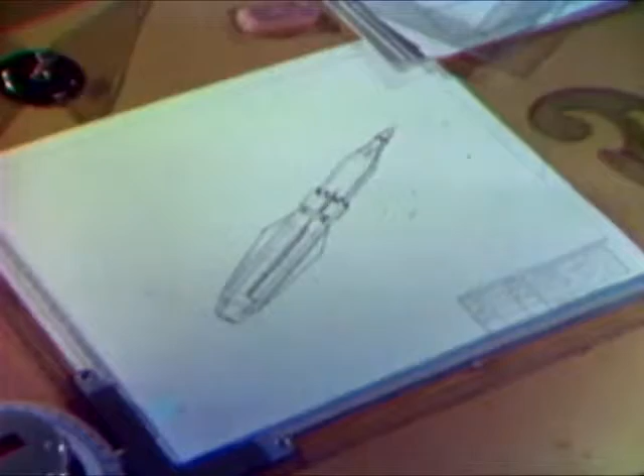Or will our ballistic missile early warning system tell us differently? 7, 6, 5. Not ours, but theirs. And if it is theirs, and this is ours? A better design on the drawing board is no immediate effective countermeasure.

Our birds must fly when they're required to. The high complexity of modern-day weapon systems demands the closest possible approach to absolute reliability. There is no second chance. So there must be absolute process control during system design and system manufacture.

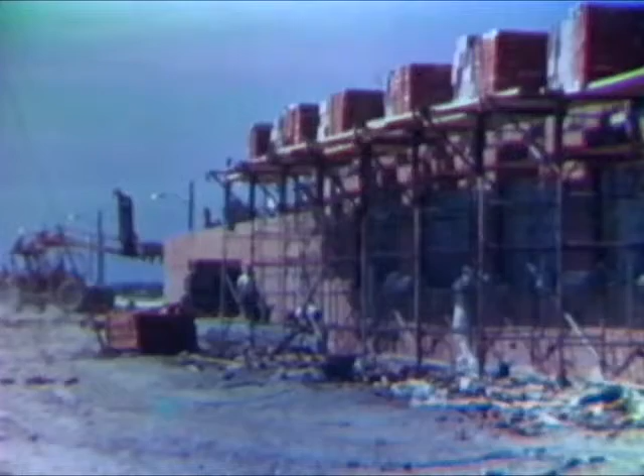Are these more imports from other lands? Or are they more exports of our own manufacture? If we are to compete successfully, both at home and abroad, our economy must expand, our industry modernize. To remain strong, to remain free, to enjoy the good life.

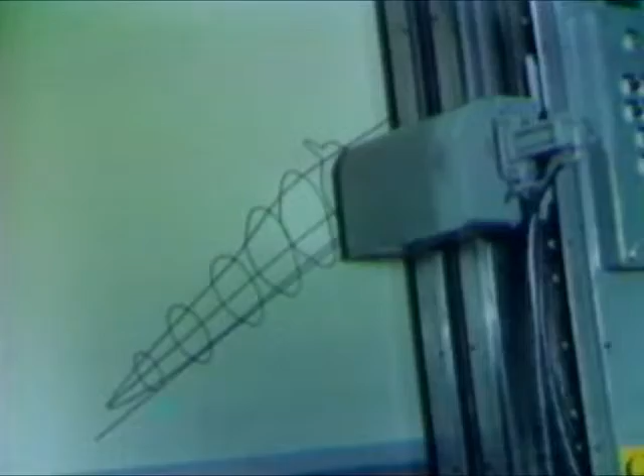We also need newer and better aerospace vehicles, and we need them fast. We need newer and better weapons, and we need to get them from design concept and into operation more quickly and at a reasonable cost.

We need new and better products for civilian consumption. Products which can compete with foreign goods here at home or in foreign markets. We must have modern manufacturing, as modern as we can make it. Modern manufacturing is a command performance.

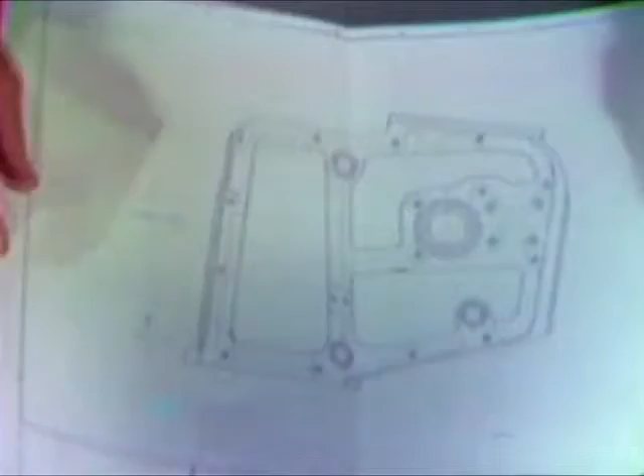Command performance. Well, we usually have enough command of our process to get the performance we want. Of course, it takes a lot of time to get from a set of new drawings to a finished product. But time is something we don't always have. The period from development to product is growing shorter and shorter. As someone said, time has collapsed.

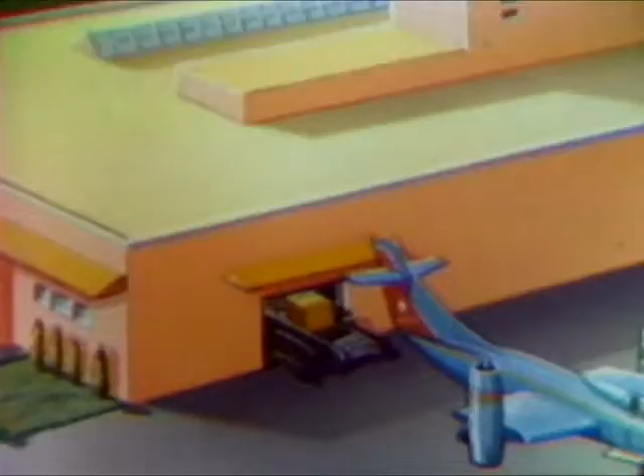Now let's try this process. Say the complete product is a Type 20K, and we're changing it with a modification of the Type XR. Now, suppose all you needed to do was to say into a transmitter, 3 Type 20K modification XR. Orders to the plant. That's right. You merely define what you want, and in a fraction of the time it would take conventionally, your product's manufactured, assembled, and ready to ship. And that component we were talking about is only one of many making up the complete product.

How could you do all that so quickly? Not only so quickly, but in much less space. You'd need a much larger plant to do this by conventional methods. Oh, this is not conventional. Not at all. This is a modern plant. Really modern. What do you mean by that?

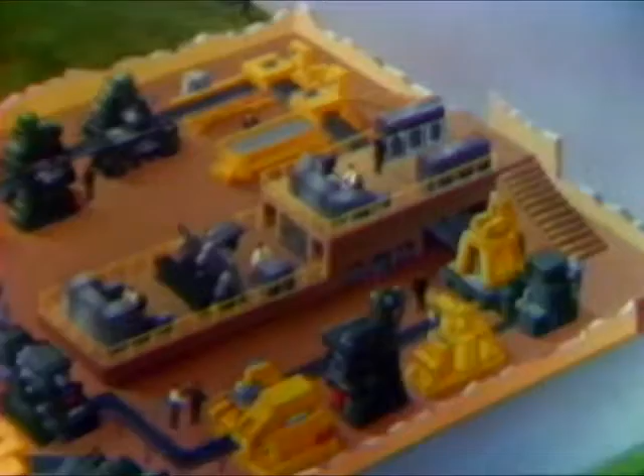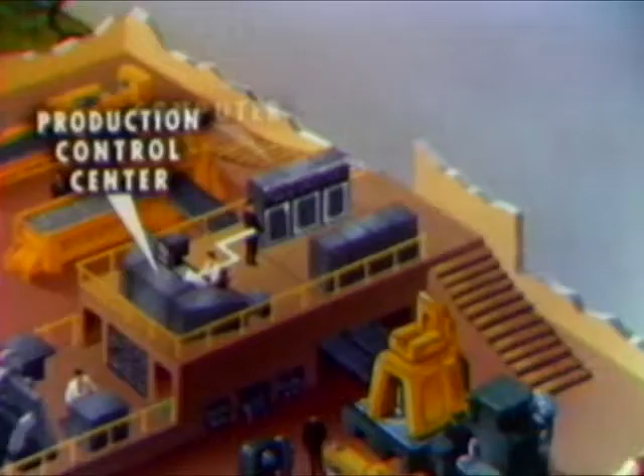When you give your command over the mic, which may be in the plant or remote, almost anywhere, the information feeds into a voice converter, which translates your language into a language which the computer can understand. The computer analyzes your request, then draws on its store of information to produce a series of tapes, which feed into a production control center. This center not only controls each of the machines, but the flow of parts as well, acting as a scheduling unit.

Now all of the manufacturing units are actuated. Basic shapes are routed to production centers for complete processing. Completed components are then checked automatically by inspection machines, then sent on to a robot subassembler. Subassemblies proceed on to a robot for final assembly, and then on to shipping. That's what I call command performance.

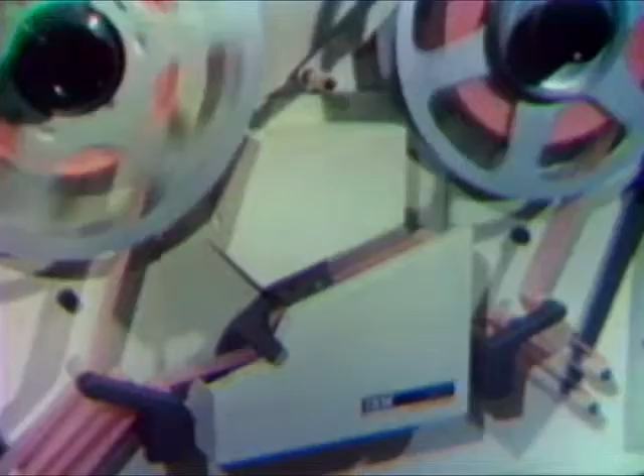Of course, I've oversimplified the process a bit. You mean you've been putting me on, don't you? Not exactly. This is not as fantastic as you might think. Take the computer, for example. Computers are fairly common today, although we still must talk to them with cards or tape rather than directly. But they're getting more sophisticated all the time. And from this information, a control tape is produced. Control tape for what? To control a manufacturing process.

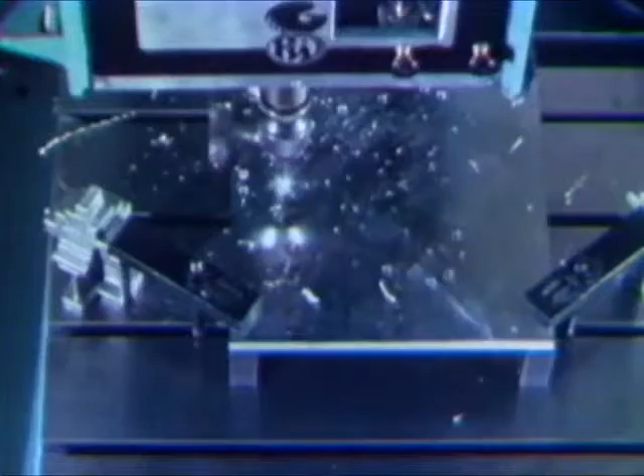Now, these machines are in existence today. Inexpensive tape-controlled drill presses. The more sophisticated turret drill presses. Vertical turret lathes, capable of high-accuracy contouring.

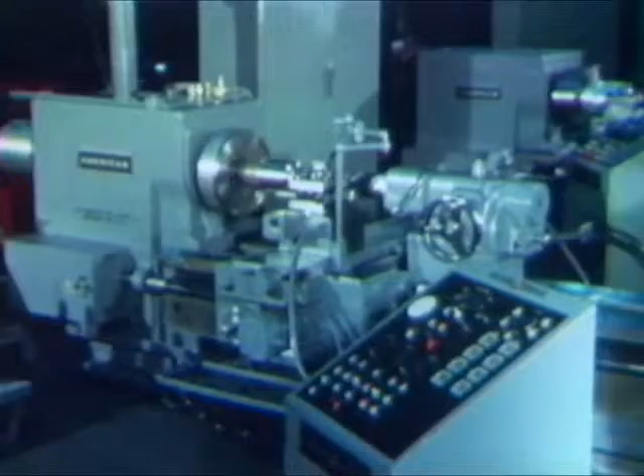Tape-controlled engine lathes. With equally exacting contouring and thread-cutting capabilities. High-precision multi-axis profiling mills. Machining centers that change tools, mill, drill, bore, ream, and tap.

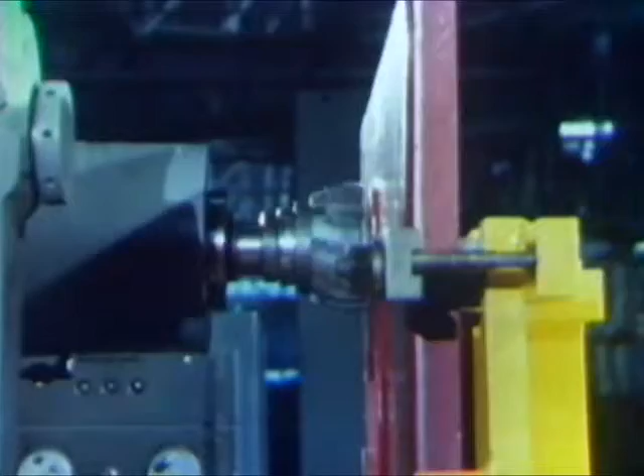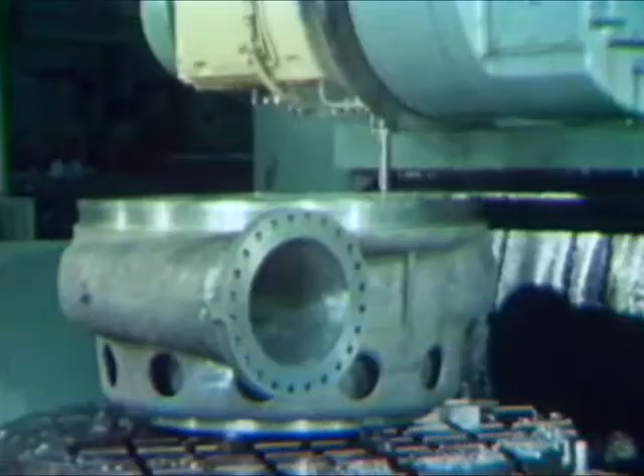In many cases, they can complete the entire manufacturing process in just one setting. Fully capable of doing that job of yours we were talking about, and even more. Now, what different tools would you need for this piece? 6 different milling cutters, 4 sizes of drills, 4 reamers, 6 taps, and 4 boring bars.

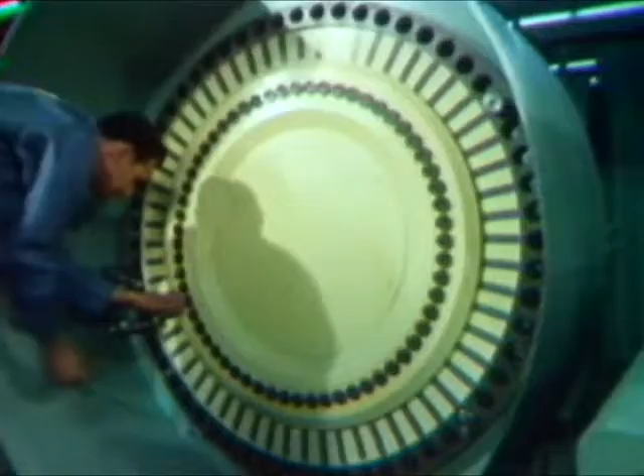And where you needed 8 machines to use these tools, the whole batch is loaded into a magazine for use by this one machine. All the instructions to the machine are on a punched tape. The intelligence on the tape tells the machine exactly what to do.

This is called numerical control, which is one of the means of using mathematical definitions to furnish intelligence a machine can understand. There are many methods of accomplishing this. However it's done, it certainly shortens the chain of command and greatly reduces the opportunities for a breakdown in communications.

There's the same casting you would have started with in your conventional shop. But notice there's only clamps required. The machine itself will even make its fixtures from tape control if necessary. And there you are. All the machining done in only 45 hours.

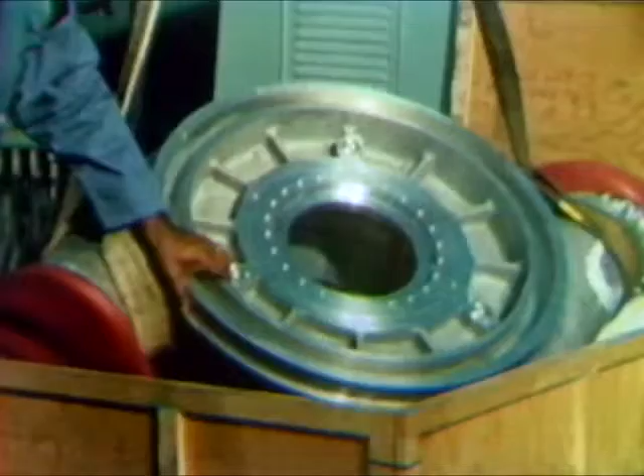How long would it have taken in your shop? Oh, about 300 hours to machine and 26 weeks of lead time. After you tooled up. Remember, the lead time here was only 2 weeks. If you need a second or third or fourth piece, you get them in a matter of hours. All exactly alike. Now that's performance.

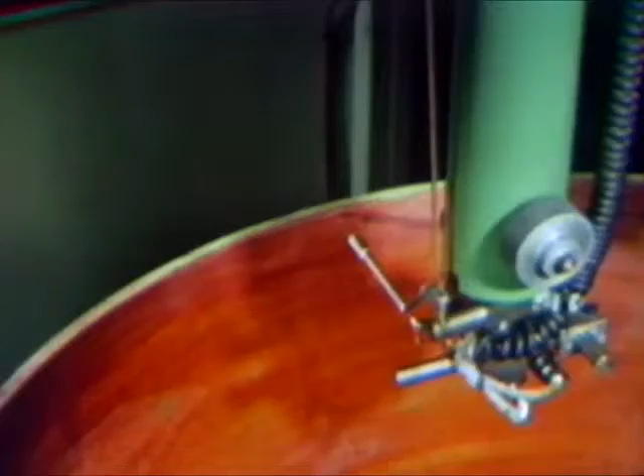What happened to automatic inspection you were dreaming about? That was no dream. They're already in existence, too. And research and development are making them better all the time. On this machine, a probe is guided by a tape similar to the one used in manufacturing the part. The measurements are recorded for inspection and record.

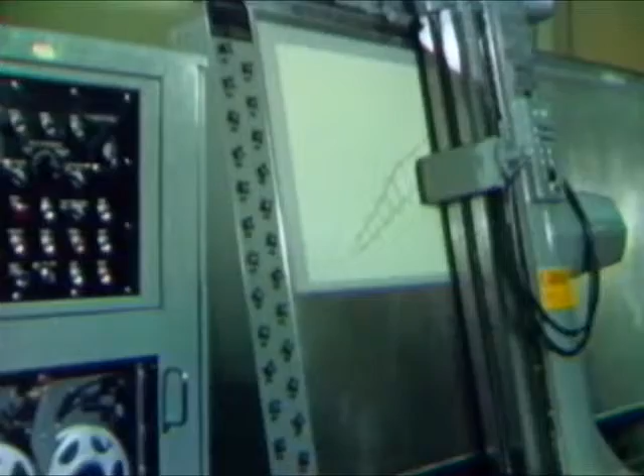But you still need an original detailed drawing, don't you? Not necessarily, but if you want one, it can be made from a numerical control tape too, operating a drafting machine. Often the drawing can be made at the same time the part is being made, using instructions from the same tape.

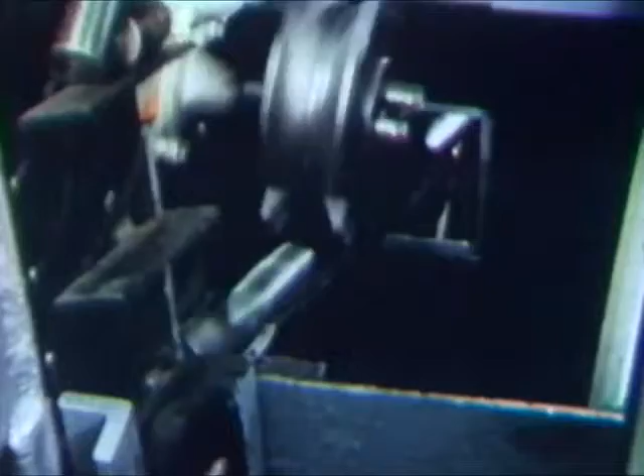I noticed the loading and removal from the machine is still conventional. But it needn't be. You'll find automatic loaders and transfer mechanisms on a lot of production lines today. This automatic material handler remembers every sheet in its inventory and will deliver it undamaged in seconds.

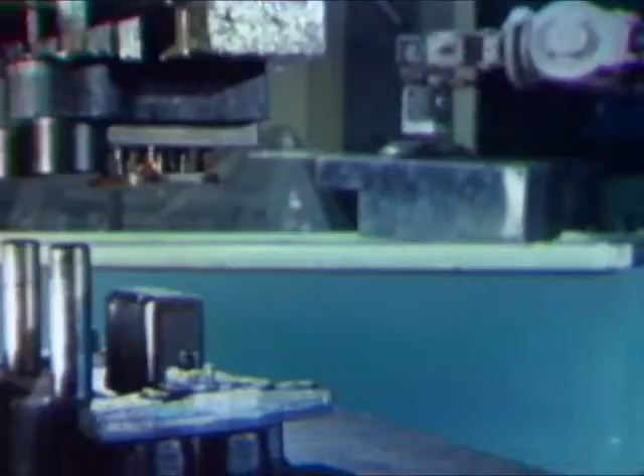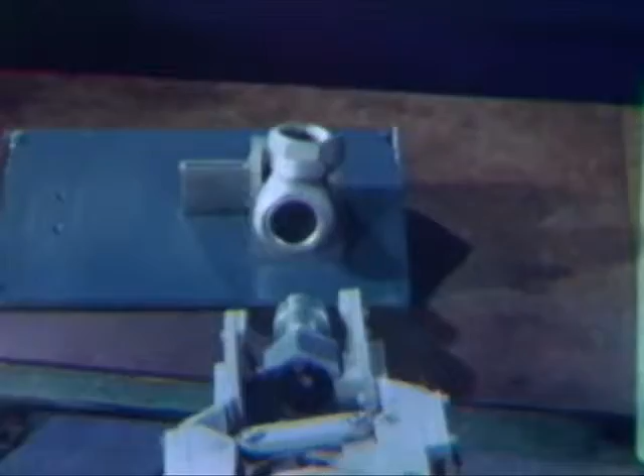This robot manipulator will perform a variety of handling operations. It can be easily taught to load, unload, and assemble parts because of its electronic brain. So you see, we have practically all the elements of our plan of the future. It's just a matter of time before someone puts them all together to make the dream a reality.

I don't know that anyone has ever produced a crystal ball on one of these machines, but you don't need to be a fortune teller to realize that our success in aerospace depends upon our national capability to produce combat-ready systems with complete reliability. We must produce first, best, and at the lowest possible costs, which are consistent with reliability and reproducibility.

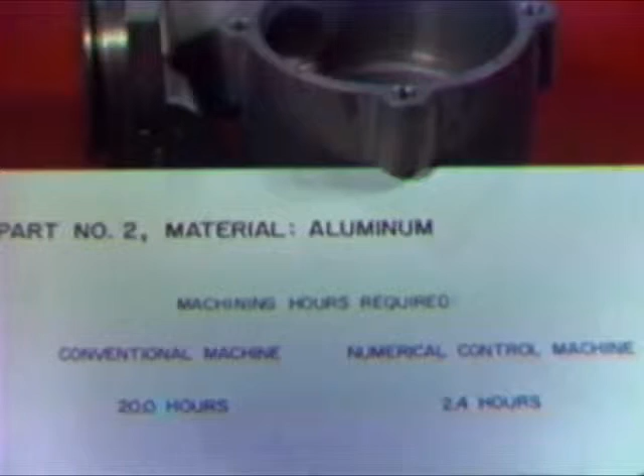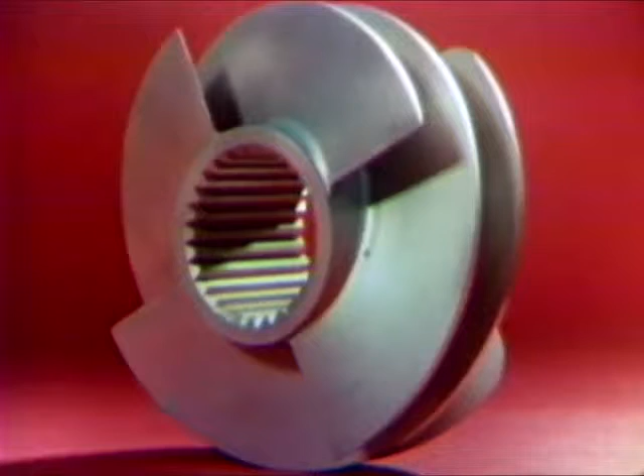This means that we must be able to manufacture from all sorts of new and exotic materials. It means we must be able to produce structural members with a high degree of configuration complexity. It means we must produce with greater dimensional control. Some large rocket engine inducers, for example, can't be produced to design concept by conventional manufacturing methods. It means that we must produce components which have structural integrity.

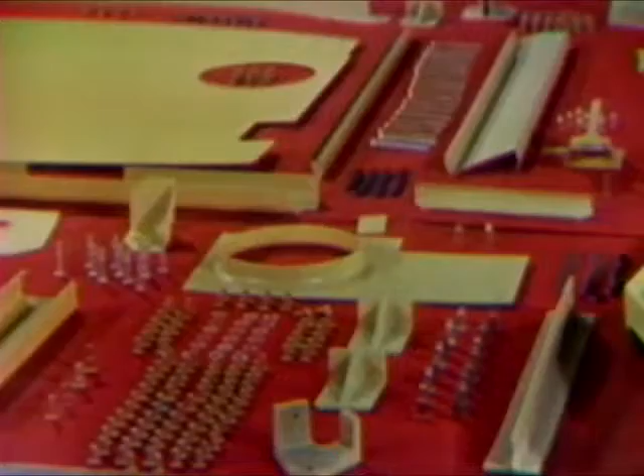This aircraft bulkhead was built up of over 90 different parts, requiring more than 1,000 rivets and high-strength fasteners. You can imagine how long it took to tool, machine, and assemble all these parts. And you can imagine the possible human error involved. The more modern one-piece bulkheads have greater structural integrity, but they were still expensive.

These one-piece bulkheads were first produced by conventional methods, using specially designed tracer-controlled rotary tables with many coordinated overlay templates and tracer patterns. It took 160 hours of machining time to produce one bulkhead, and at considerable cost.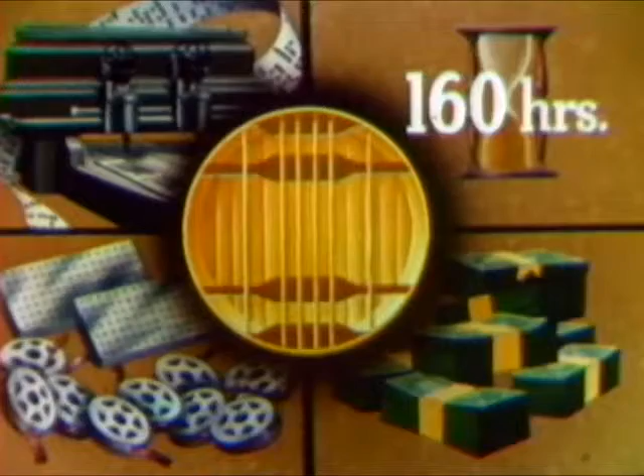The part is now programmed on a numerically controlled skin mill to machine 2 at a time. This requires only 2 sets of vacuum chucks and 9 reels of tape. The time reduced to only 9 hours per part, and the cost reduced by 80%. In addition, there's a 25% reduction in weight. Command performance? I'll say. But you can best get it with numerically controlled machines.

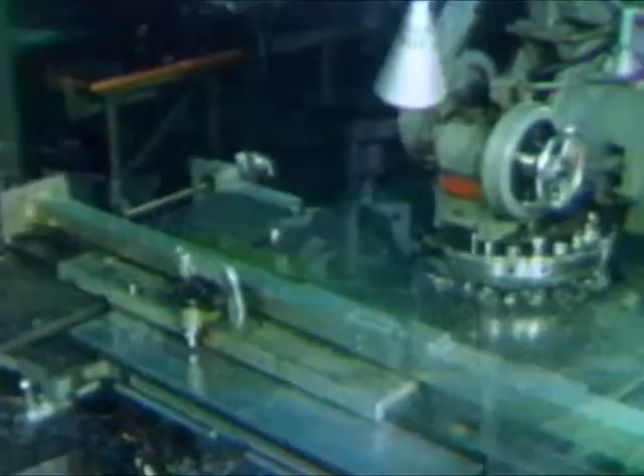Can this type of control be applied to other types of machines? Certainly. There are machines that automatically position and punch all types of panels. Machines which build up rocket motor cases by the controlled winding of glass filaments.

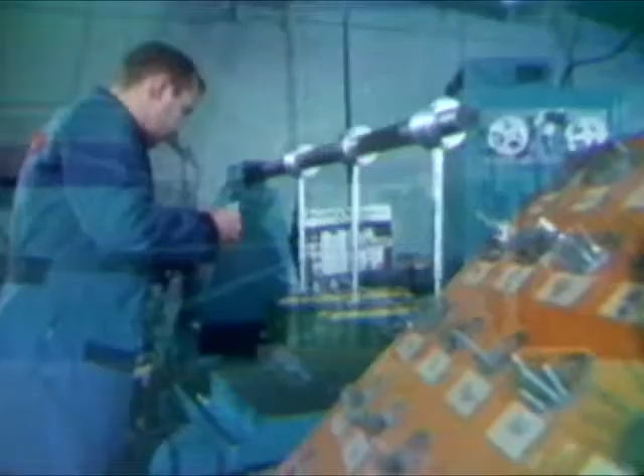Machines that position connector panels for wiring. Machines that position and mate the wiring connections on assembled electrical panels.

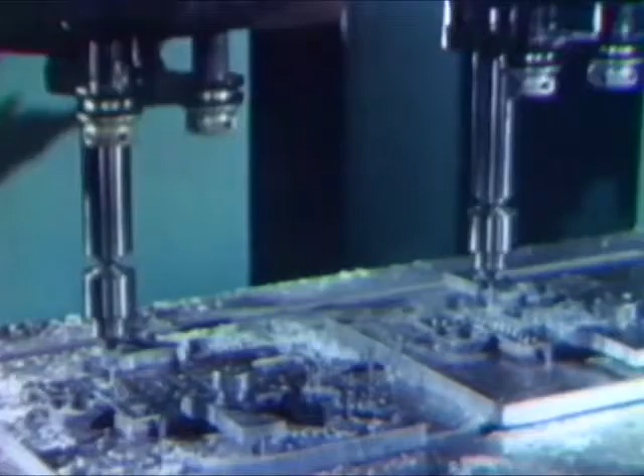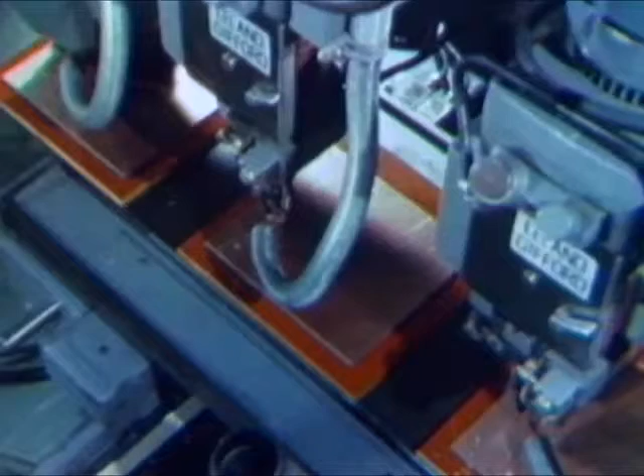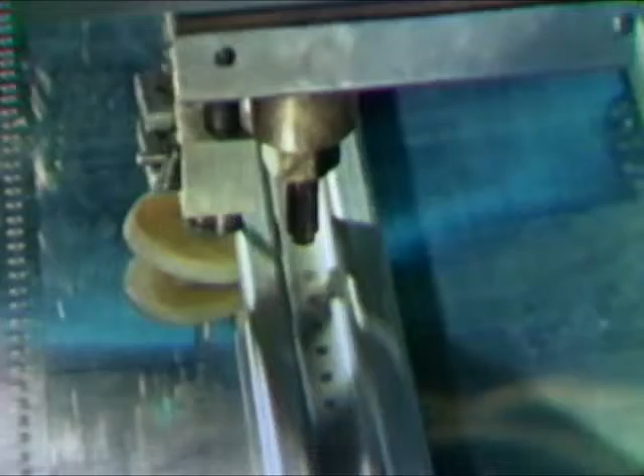Machines for drilling printed circuit boards. Machines for inserting the components in these boards. Machines for spot welding, which saves 72% in labor costs. This machine has proved invaluable in spot welding fuselage sections.

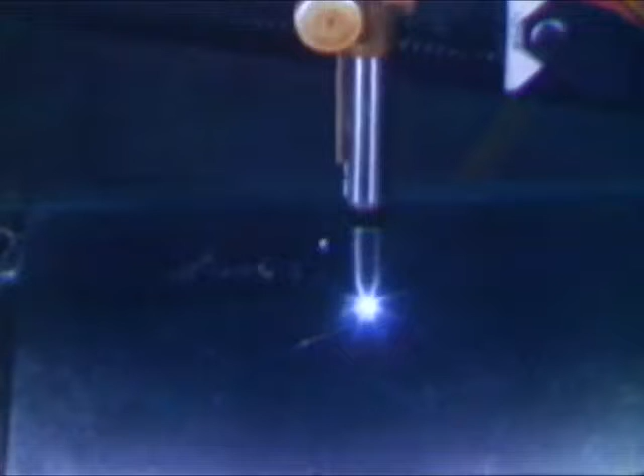The more complex fusion welding also can be performed by numerical control. The tape not only controls the positioning and movement of the arc, but also the welding factors, gas flow, current, and the like. In guiding the arc, the control permits blind welding down through one structural member to fuse it with a hidden member below. The result? A stronger weld, a member with more structural integrity. A more reliable weapon system.

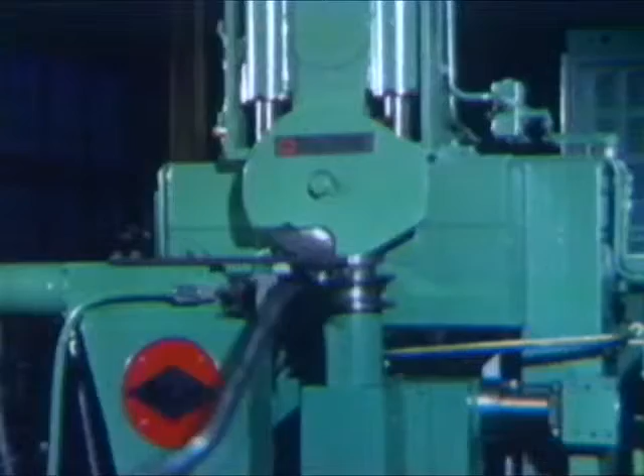Tubes can be bent by numerical control also. Tailpipes that fit any car precisely. Or the miles of plumbing used in modern missiles, and all without the need for separate jigs and setup time.

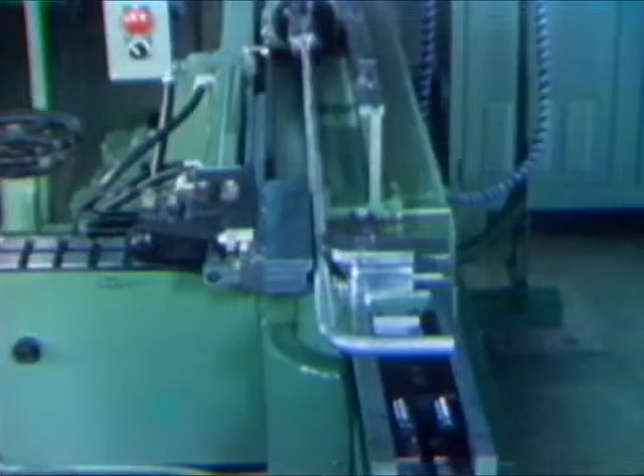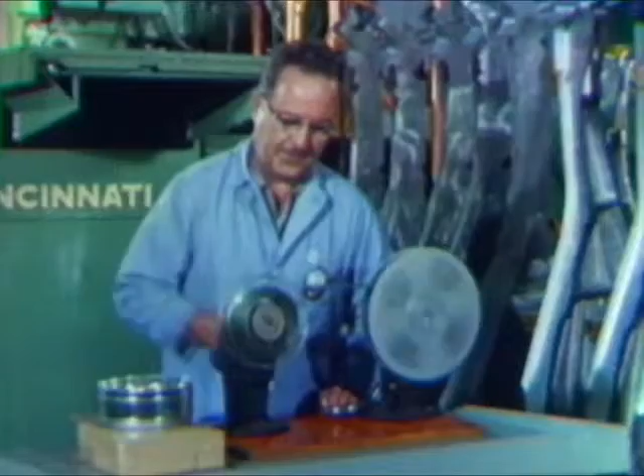By far the most versatile and flexible are the numerical controlled machines. For one piece or production runs, they're the answer to involved machining operations. And for machining control, you can't beat instructions which are fixed and not subject to human error or emotion. Why, this tape could be sent anywhere in the world to a similar numerically controlled machine. And it would produce a part interchangeable with the one produced here from this tape.

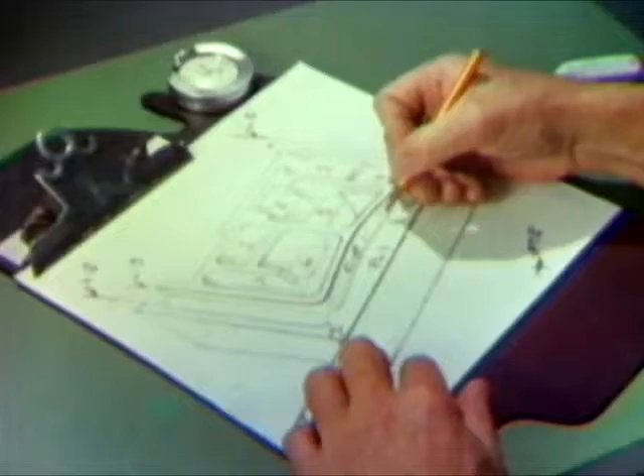May we backtrack a moment? Surely. Just how do the instructions get to the machine in the first place? Well, let's begin with your own sketch of some part. Make it complicated. We'll hog it out of a block. Let's use master dimension. Okay. There you are, with all the essential dimensions, but scarcely something a machinist could work from. That took you about an hour.

Now, we'll take this to a programmer as the next step in tape preparation. And there's the program. Now, let's see, that took about an hour and 45 minutes. Add that to the hour for the sketch. And the 5 minutes it took us to get here. And the total's 2 hours and 50 minutes. Those words on there look sort of familiar, but different. That's right. They're a kind of pidgin English.

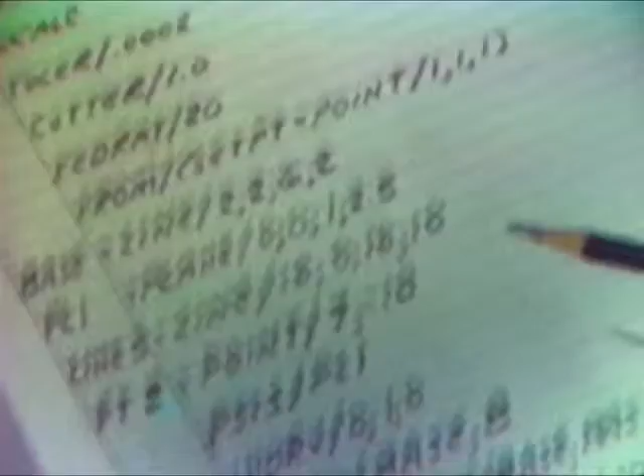This information will command the tool to start from the point called set point, which is defined as the point with coordinates 1, 1, 1. With the tool on the right, it is instructed to go right along the line base. At this point in the operation, the tool is sent forward to start cutting a previously defined circle about a previously defined point 2. Now here's that circle on the sketch. You can see it's a language that you can readily understand and use, and one the computer can understand too. As of now, conventional computers do not accept oral commands, so the instructions are put on punched cards or tape.

We're moving right along. Just 10 minutes for that job, for a total of about 3 hours. Now the computer operator gives the commands to the computer, which translates them into machine language. And here are the commands we'll take to the machine. We've now spent only 3 hours and 20 minutes. That's really chopping down lead time, isn't it? Yes. I expect it would have taken me weeks to design a tool for this job. It might be a good idea to think about modernizing then.

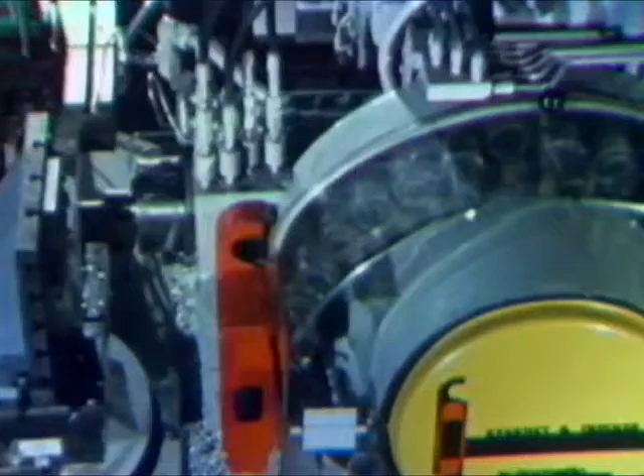This whole system's called numerical control? Well, the machines are operated by numerical control. When you talk to a computer, though, well, that's a little higher order of communication. I suppose you might call it symbolic control at that point. But look, your part is already being manufactured. There's your part. Just 4 hours after you started making the sketch. You want to check it out? You bet. Amazing.

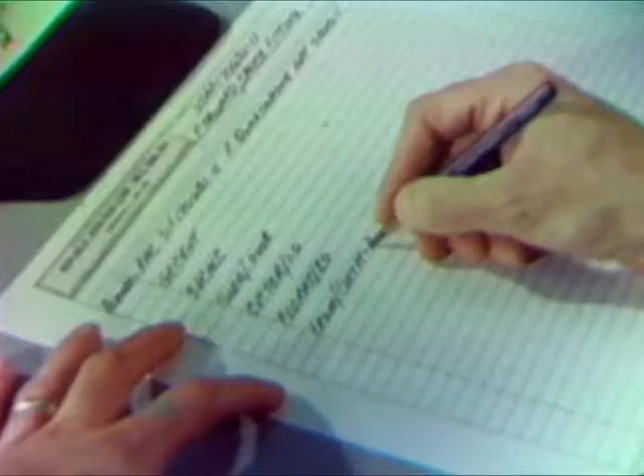Absolutely amazing. You see, what happened was that the machine did what machines can do best, and humans did what humans can do best. You did the designing, the creating. The programmer planned the process from his knowledge of machining and the particular machine. And being human, you were able to start a chain of command to the machine, a very short and very exact chain. As a result, you obtained a superior performance from the machine, far better than by conventional methods. And you get the same performance time after time, because the commands cannot change. And that's why you call it command performance.

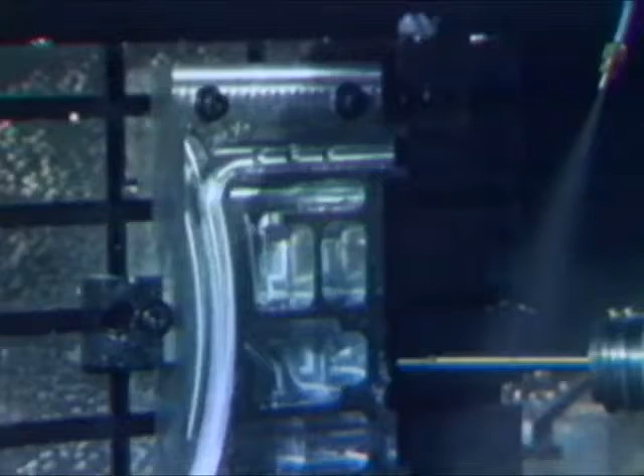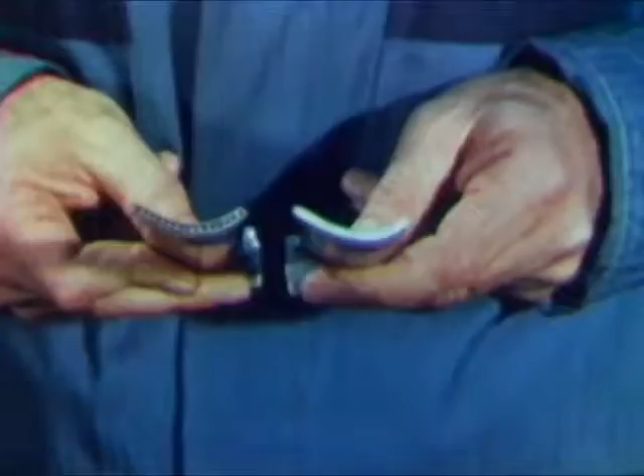That's right. Well, what about the actual joining, forming, or removal of metal? What's new along these lines? Plenty. Electron beam welding, for one thing. Here, even two dissimilar metals can be permanently fused together by the high-velocity electron bombardment in its vacuum chamber. Electrolytic machining, for another. The cooling holes in this turbine blade were eroded to exacting tolerances by this stem drill. The hollow drill electrodes never touch the material, so they need not be reset or replaced.

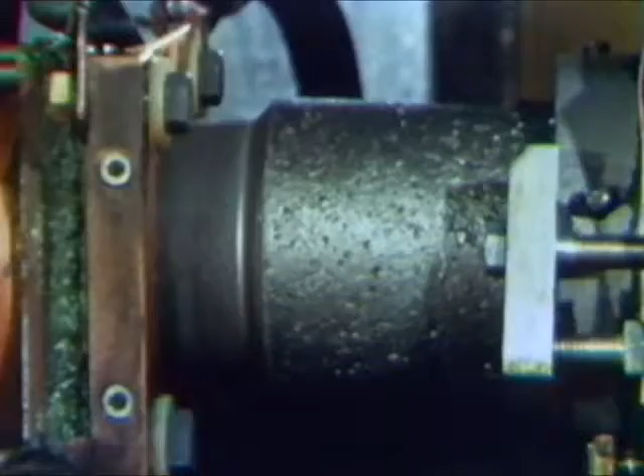Just the opposite of electroplating, huh? Correct. This finished turbine bucket was shaped from high-temperature material. And here are the shaped electrodes that were used to do it. The process replaces a dozen conventional machines and produces a yearly savings of about 80%. When subjected to enough pressure, metals become plastic and are easily formed. This vertical shear former produces turbine compressor shafts at a savings of $1,500 per part.

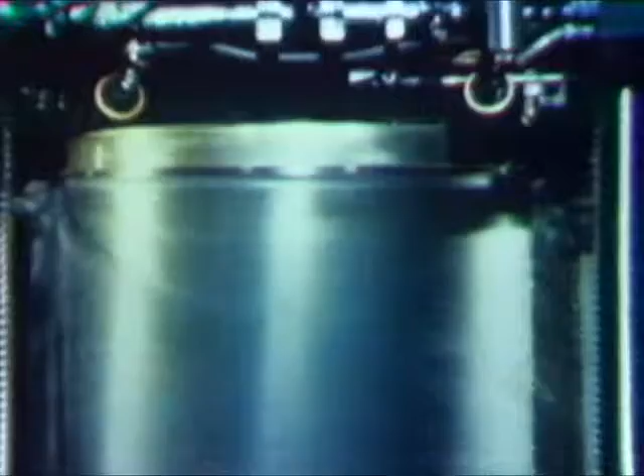Similar machines will turn out shapes such as cylinders, cones, and rocket motor cases from practically any metal, including many of the exotic alloys. Or suppose your product needs formed parts, like this. This machine pre-stresses metal to its yield point and has a tension control system, so that forming is accomplished with high accuracy.

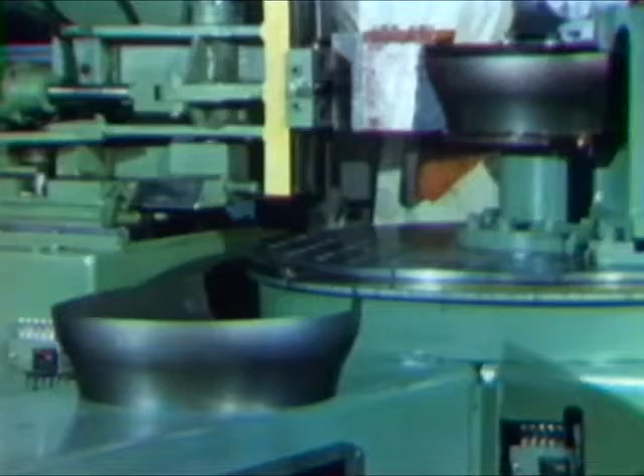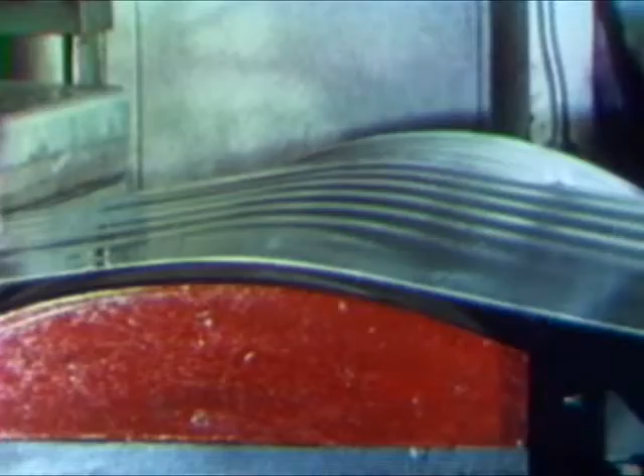This jet engine part was formed from Rene 41 in just 2 minutes, and the savings over conventional methods is 80%. A similar type of process will give you savings of up to 90% on drawn components like this, and permits the use of inexpensive dies. This blank holder, adapted to a conventional press, pre-stresses the metal and makes it more flowable than plastic. By adjusting the stress, almost any metal can be formed using the same die.

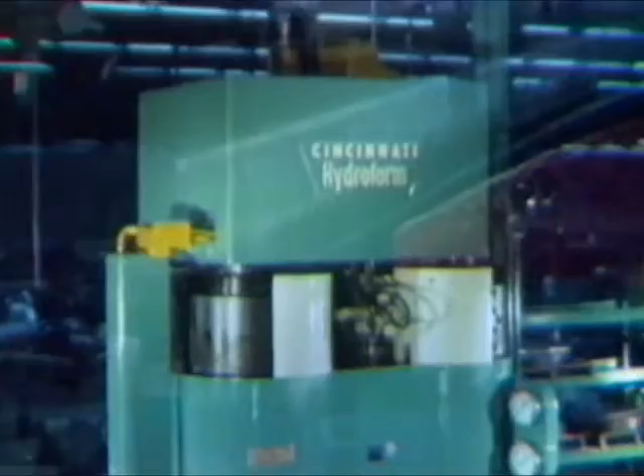Normally, 3 draws would be required to produce this part, with 270 hours of handwork for finishing. But here it is, produced in 1 stroke, holding its shape without springback and maintaining that shape throughout subsequent welding. This hydroform turns out complex shaped parts in seconds that formerly took hours to fabricate, assemble, and weld. The rubber bladder reduces tooling to only 1 inexpensive die.

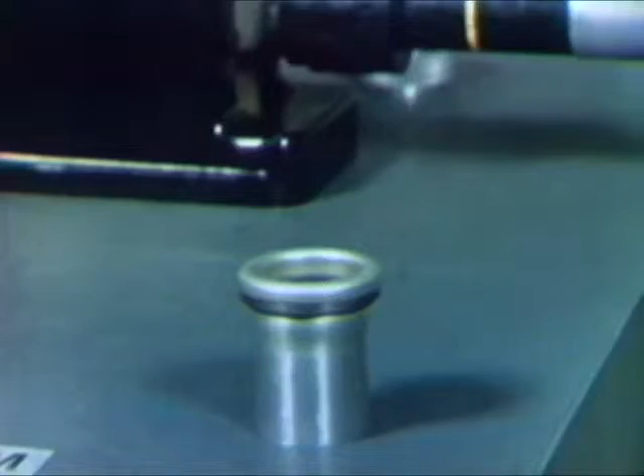Want more savings in forming metals? Perhaps electromagnetic metal forming is the answer. This process uses powerful magnetic fields to swage, expand, compress, coin, shear, and assemble conductive metals without mechanical contact with the work. This machine uses the explosive power of man-made lightning to form parts.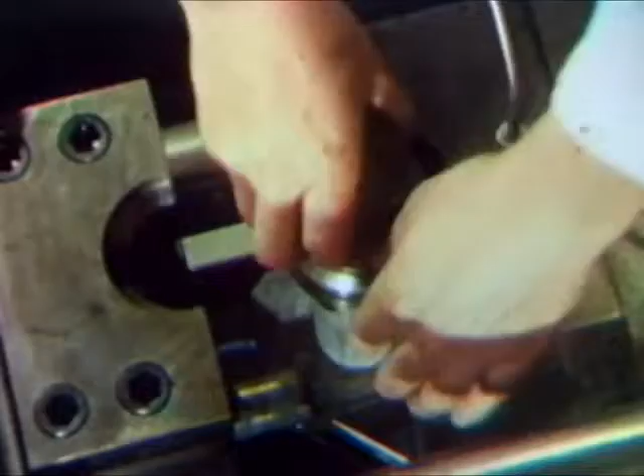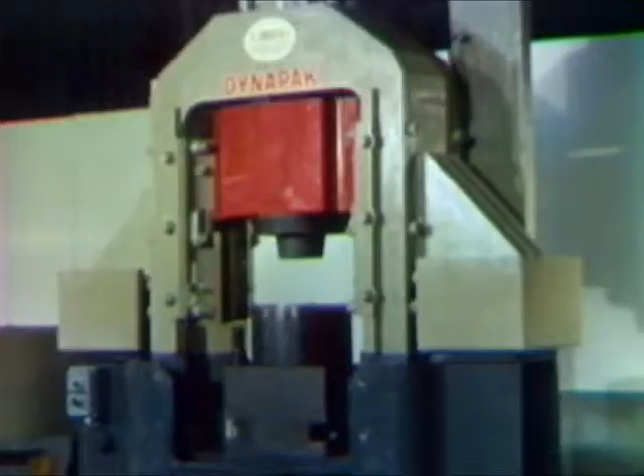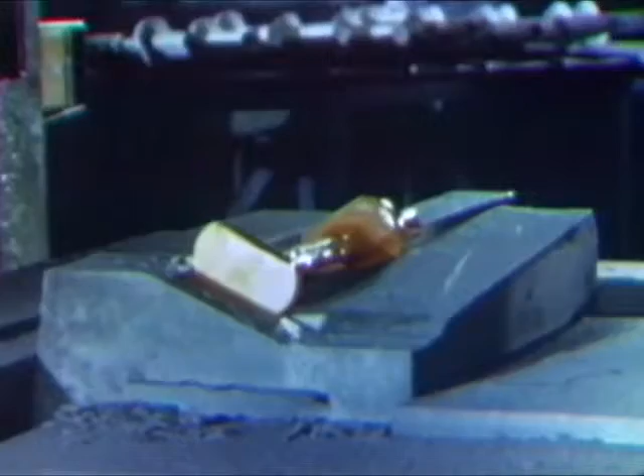What about forging? How about that? That's high energy rate forging. These machines will deliver a terrific amount of energy in a split second to forge such materials as tungsten or even cast iron, as well as the usual materials. High-tonnage mechanical presses also offer great savings in the production of precision forgings.

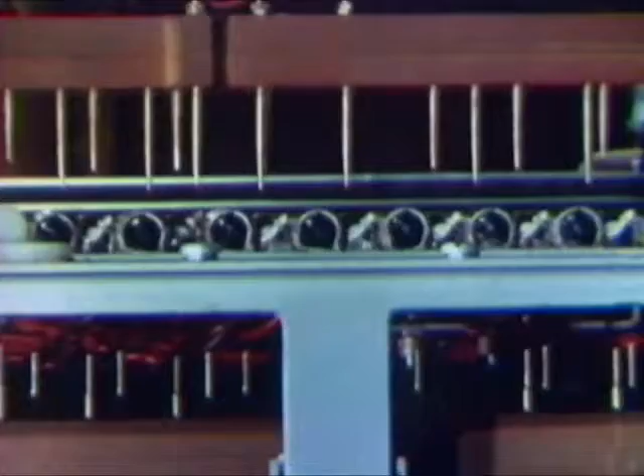For testing electronic systems, there's automatic testing equipment. Here's a complete checkout of a wiring harness. This machine checks missiles, computers, servo systems, and the like. The results of the tests can be recorded on a printed readout. And the savings? Well, in addition to the time, this piece of equipment replaces 150 separate pieces of test equipment required on many of the complicated checkouts.

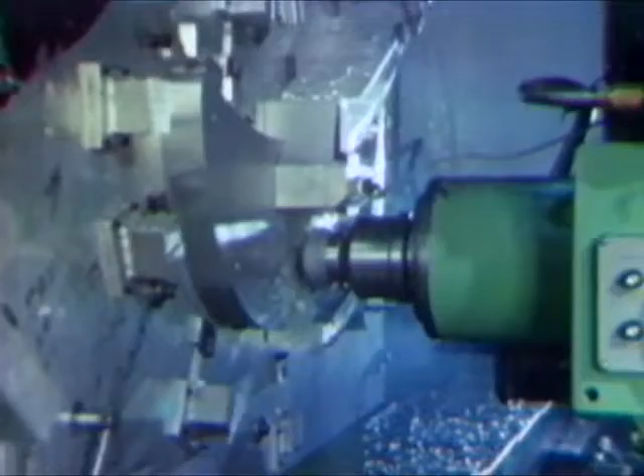Imagine what all these methods of modern manufacturing are going to do for the designers. And of course, you've seen only a few of the many new methods available today. No need for them to be limited by the restrictions of conventional manufacturing. They can now design a part to do the best job without compromise with manufacturing limitations.

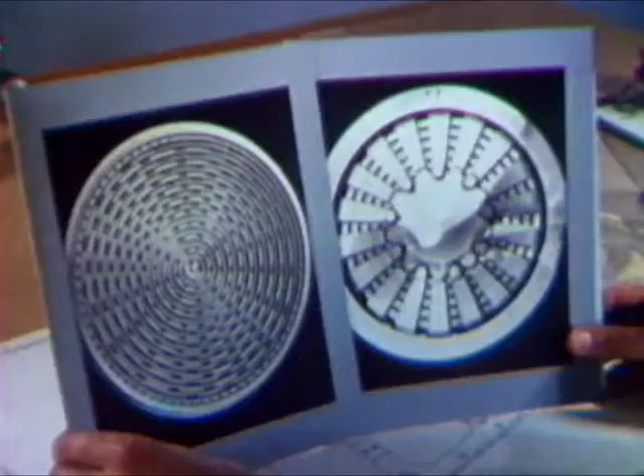I doubt if there's a machinist in the world who could have turned out this part and met the required specifications. Yet it's a vital part. And I know that without modern machining, it could never have been produced in time to get our missiles in operation on schedule. And believe me, we must be on schedule in these areas.

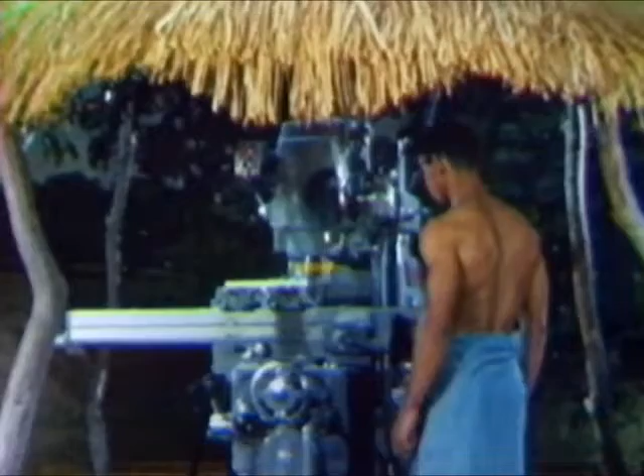You know, today in some sections of the world, the smelting of iron is still a primitive process. And metal forming is equally crude. But some of our manufacturing processes still border on the primitive. While even the most modern standard machine tools are efficient for general applications, they will not readily accept the numerical control input so vital for the effective production of aerospace vehicles.

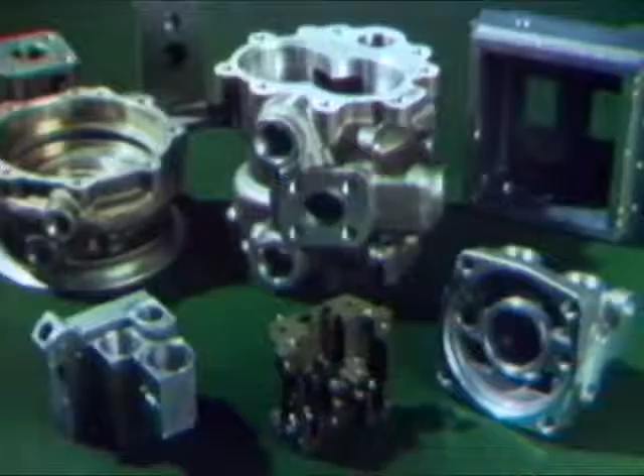We must modernize our manufacturing methods and go from design concept to finished product as quickly as possible. We must keep the wheels turning the best way we know how. We must apply what we know today and search for ever better methods. This is a command performance for the survival of industry and our country.

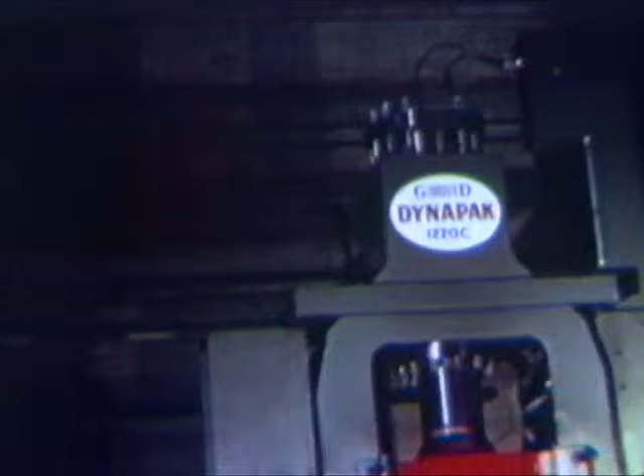Say, do you still have that clipboard? Sure. Here it is. Why? I want to write myself a note so I won't forget something. See? This is going to be a command performance, too.

Good idea. Because the Defense Department expects its contractors to maintain a modern base in their facilities. In keeping with the advance of aerospace technology, we need the productivity, reliability, and repeatability that only modern manufacturing can provide. And we all need the savings which can be effected in both time and money.